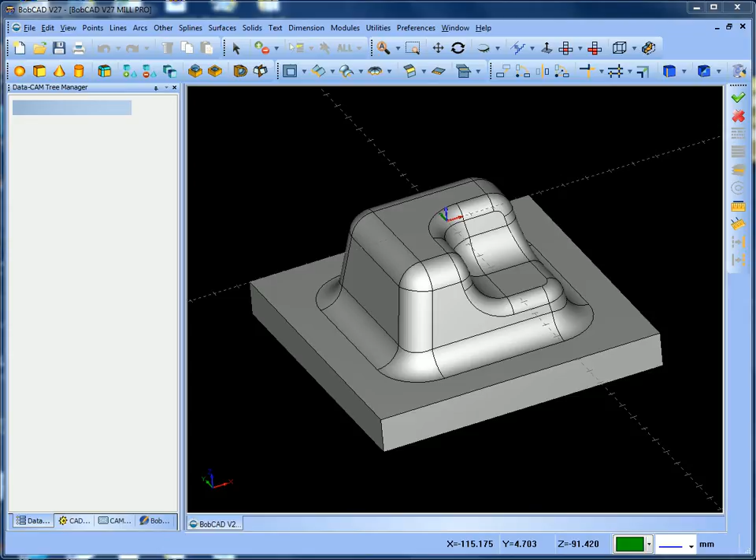So here's where we come into the CAM tree. We can see the CAM tree there, there's CAM defaults. There's the component that we're going to machine. So if I right click and new job, we're going to create a new job. Job's going to be milling. We're using the BC3 axis mill, which is the machine.

And the first thing we're going to do is go to Stock Wizard. So if we select the Stock Wizard, it then gives us the options of creating a rectangular block, a cylindrical block, wireframe, solid model, or an STL file for the stock. But the stock at the moment, I wanted to create a rectangle from this piece of material we've got on the screen, in other words from the model. Select next, and you'll see BobCAD now puts a piece of material of stock around it.

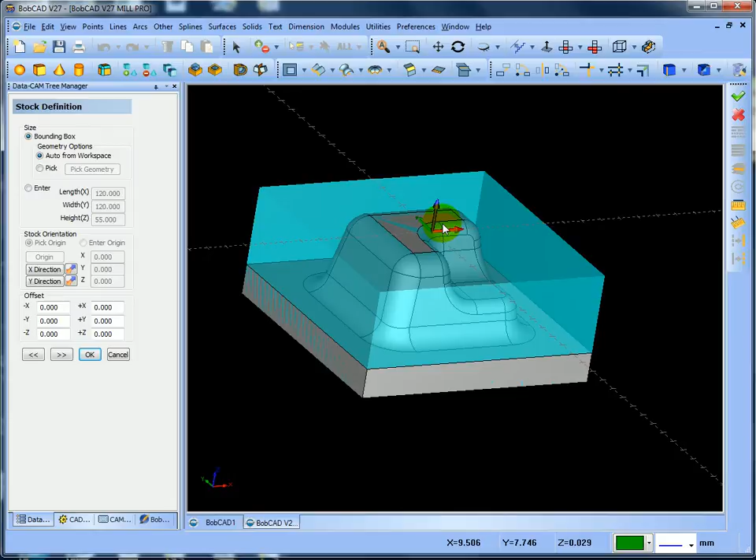You can see its length is 120, width is 120, and it's 55mm high, or below should we say, because it's Z0 and minus 55 to the bottom of the block. Now we can add material onto this if we want to. So imagine I want to face off the top of the job. We need to tell BobCAD that we're going to take half a mil on, so we need to put half a mil on this stock. So on here in the plus value, if I put 0.5 and hit the next block, you will see we've added 0.5. We'll make that 0 at the moment and select the next box.

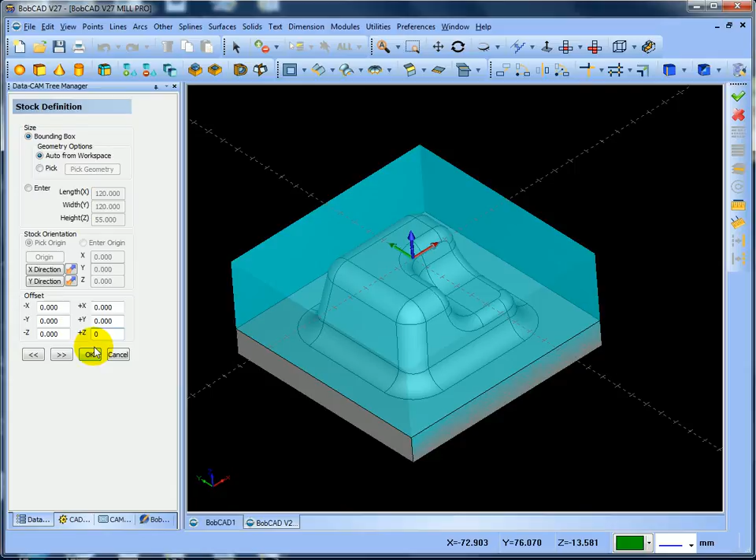So what we do then is we will continue, and here's where you can pick the datum. At the moment I've got it set on the center. If we wanted this bottom left hand corner, I could pick this bottom left hand corner. If I go into origin, come onto here, highlight it, you can see then that's where the datum's going to be. We might want to pick this bottom left hand corner here, so I'm going to pick origin again, select this, and you can see we've got it on the bottom left hand corner as we want to machine the job.

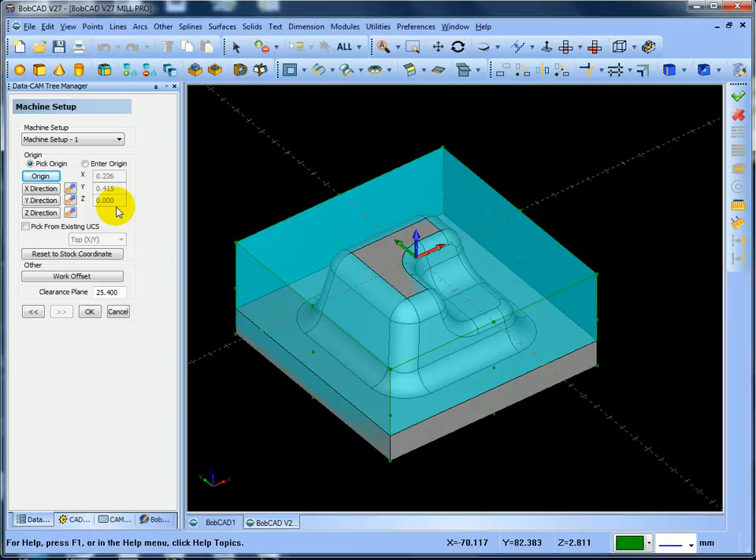But I want it back in the middle where it belongs, so I'm going to go back to origin, put it back in the middle, which is there, and the datum's back in the middle. You can see the 0 at the center point here. So we'll put that back to origin, select OK, and you can see origin is 0,0, or we could have entered that value in there then.

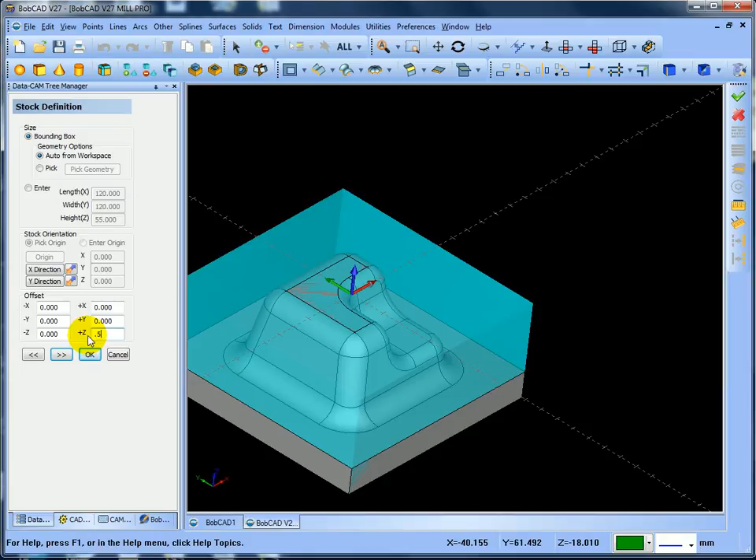So I'm just going to go back and I'm going to add that half mil on the top of the job, and you can see now it's raised it up half a mil. Continue. I want to work on that datum, which is correct, and select OK, and you can see now we've created the stock around the material. What I'm going to do then is we need to face off the top of the job.

So as you can see, this is the machine setup here. This is where the machine setup is. That's where we set the datum. We can blank the stock if you want to blank the stock. Just click on stock, right click and blank. You can see that then blanks it. Or we can right click it, press blank again. You notice the red X at the side. Now it's showing it displayed.

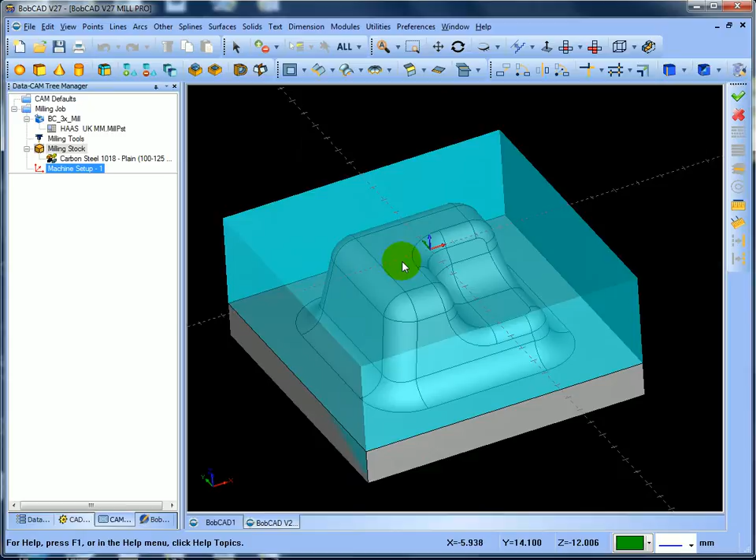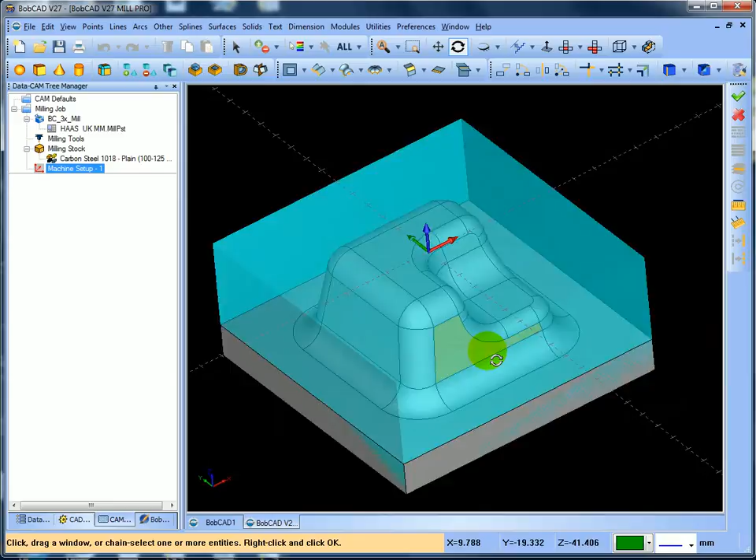Okay. So what we want to do now is we want to create a facing operation to face off the top of the job. So if we go into right click in the machine setup and we go into mill 2 axis, the first thing the software asks us is to pick the geometry. Now I'm going to go into select geometry, and I've got no information off the model regarding extracting information. As well, in BobCAD we don't need to extract. All we need to do is we decide we're going to pick that bottom surface there. Now I can just left click it, come away, and if I right click it and press OK, it's selected it.

If I go next, if I just press cancel and do exactly the same again, right click, mill 2 axis, select geometry, I've highlighted it. Now to save you pressing your mouse button, you can just press the space bar. When you press the space bar, it means OK, it's exactly the same. So if I press the space bar, you can see now next, it's still picked the geometry off the top of that. So what we're going to do is the rapid plane is 10mm above the job.

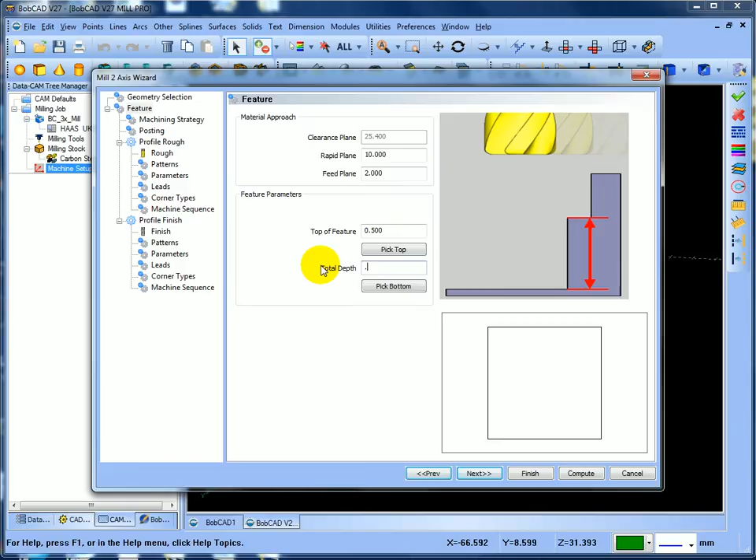Feed plane is 2mm, top of the feature is 0.5mm, which is correct, so we want to take 0.5 off as well. Next, we're going to do some facing operation. Select next, work offset number 1 or G54. We're not doing any rotary output, and we're doing everything in arc moves.

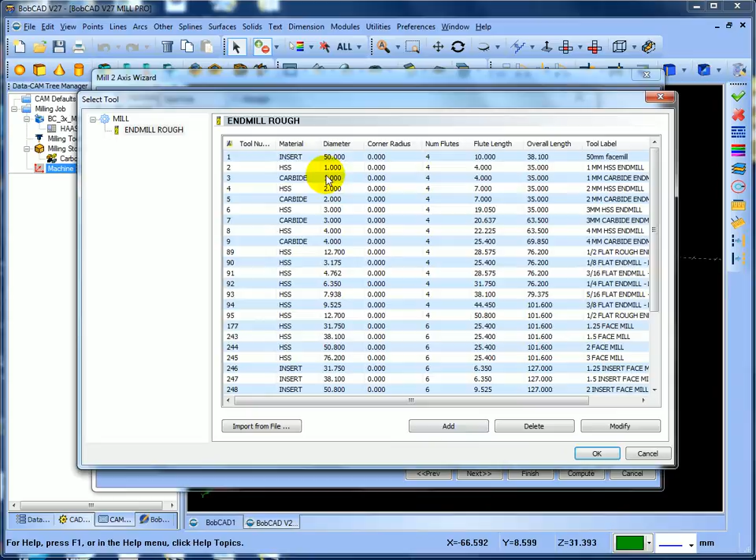Select next. So here's where I want to select the cutter. Now I want to select the cutter, and I have some in my tool crib. So in other words, if I go to my tool crib and go into my add from the tool library, you'll see I've got a 50mm cutter already set up in there. Now at the moment, when you buy the software, it will be all Imperial. Now you can work on the fly and just put things in, or you can build your own tool crib. It's up to you at the end of the day, but sometimes I find it easier just to create the tool on the fly.

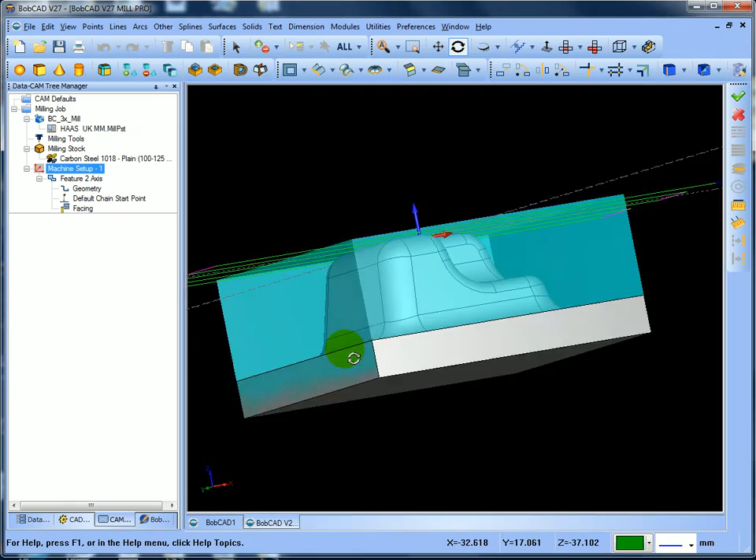Select next. We're going to go zigzag back and forth. We're going to come off the workpiece by at least the radius of the tool. I'm going to do it in the X direction. I want width of cut 50%. Select next. Bottom allowance nothing, so we're going to take 1 cut. Next. Length 6.35. Next. And we're doing direct, or you could come round with an arc or direct. Select compute, and you can see I've created a toolpath on the top of that.

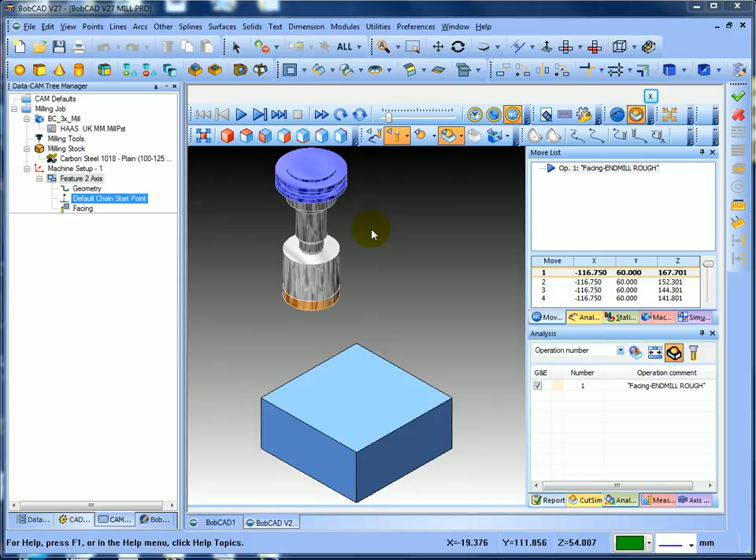Now in the simulation, you can see that feature there. If I go into modules, simulation, what it'll do then is come to the simulation, and the simulation shows the block that we generated for stock. I'll take the toolpath off, and all I'm going to tell it to do is come across and machine that top surface, which it has done. I can put the model on, the model's underneath, and I can do a comparison between the model and what we've just chopped off there.

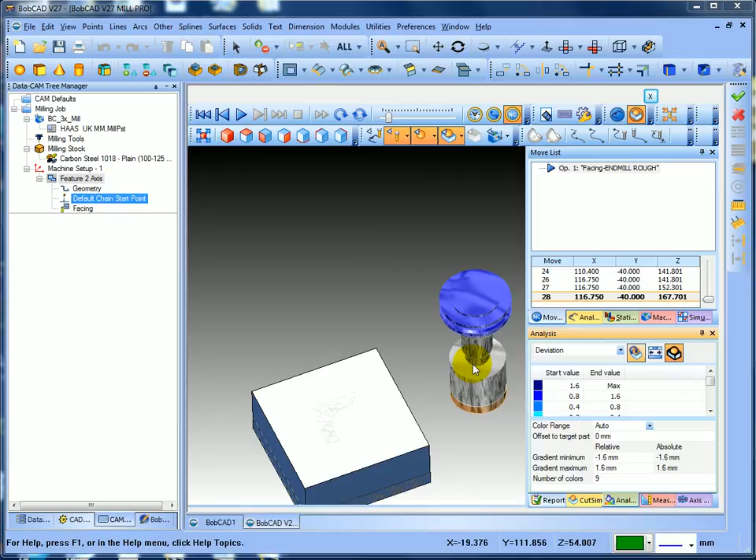So if I go into here, select deviation, select OK, and what it'll do is just refresh the screen, and we'll see the deviation come into it. So there you can see it. If I actually turn the model off, you can see we've got a green, just view all, and you can see we've machined the top of that, and it's showing us a green mark that we are at that position. So if I close the simulation down, you can see we've gone across it that way.

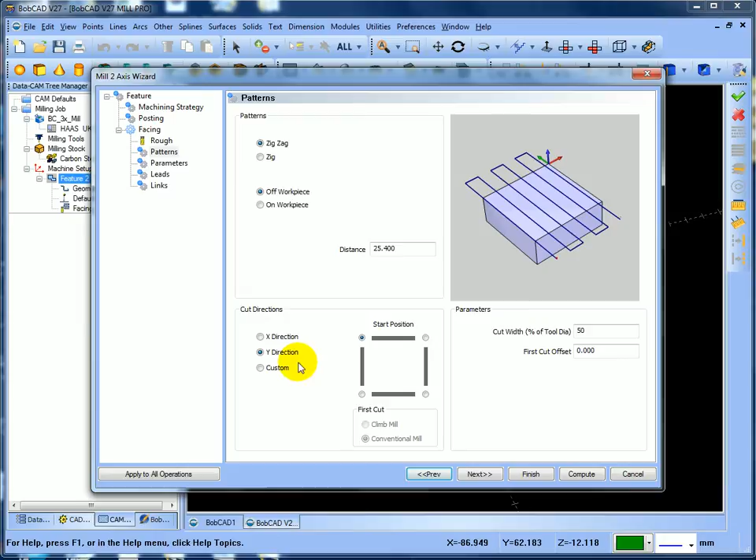If I right click and edit, I can go into the patterns. In the patterns I can go into the Y direction and say I want to cut it in the Y direction. If I select compute, you can see it's going the other way now. So if we go into modules, simulation, and we turn off the toolpath, we can see it's going to go the other way now, which is what it's doing.

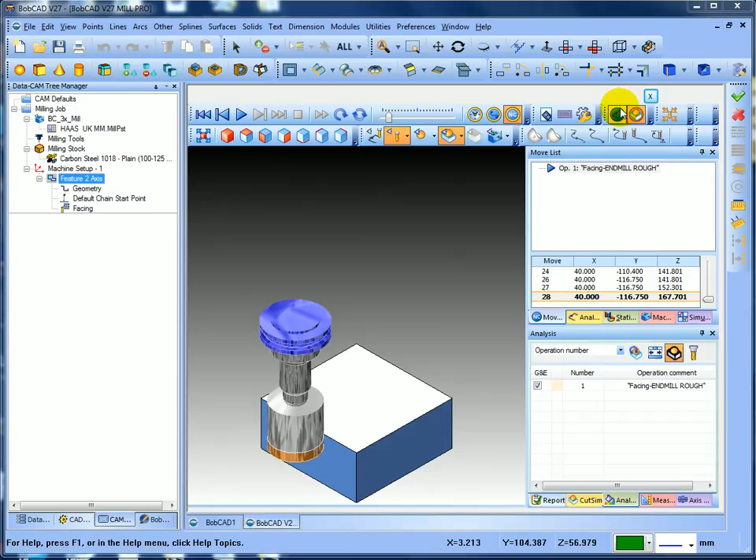Okay, close that down. I could, if I wanted to, right click, edit the operation, parameters, go back into patterns, custom, and 45 degrees, and compute. And you can see now, if I right click, we'll go into modules, simulation, take the toolpath off, and you can see now it's going to cut that at 45 degrees across the top of the job. So you can cut that face any angle you want. You can cut it in the X or the Y, or you can cut it at your own angle, whichever you want to do.

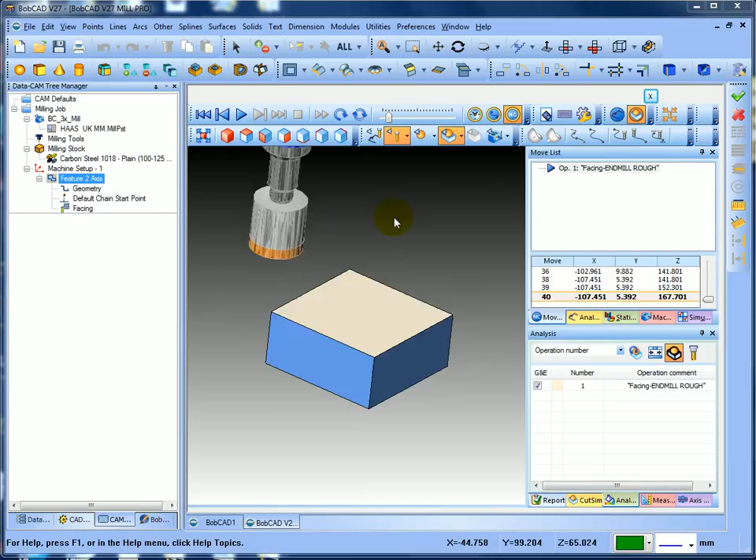Okay, I'll pull that back, edit, and go to features, patterns, go into the X direction, compute, and you can see now it's back to going in the X direction. If I right click and edit, let's go to leads, links, I'll do it with an arc, and tell it to compute. You can see now radially it will come in, then come round, come in, come round.

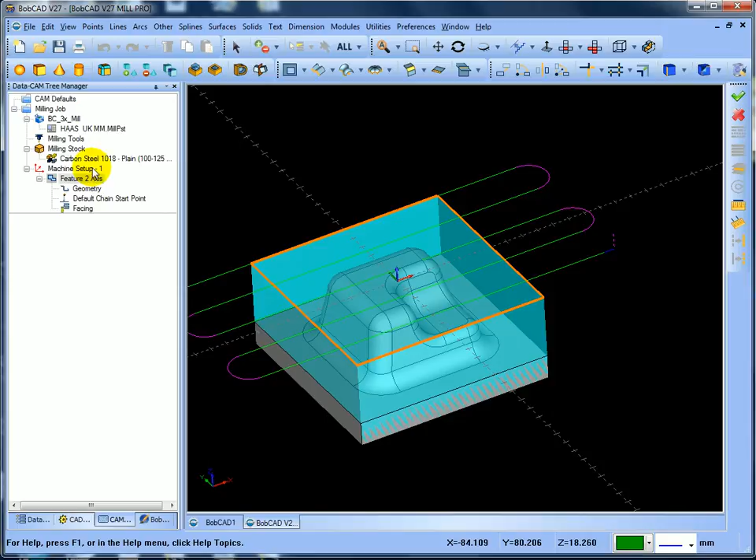So modules, simulation, and what I'll do then is just turn the toolpath off, and it'll come on, and you can see it's arcing round. So you could stay on the face, not make that length, and then just come round so you're just cutting straight onto the surface.

So what we've done is covered the facing operations. You can see where you can change different directions or cut it at different angles. What we need to do next is to rough out the 3D shape.

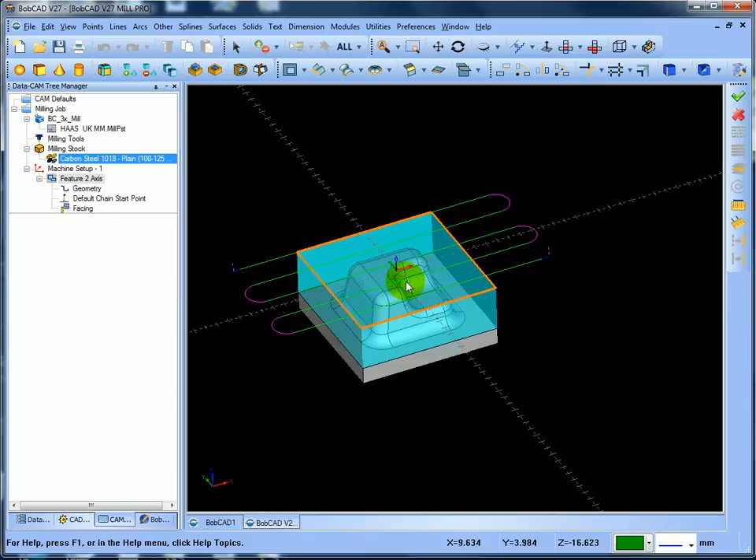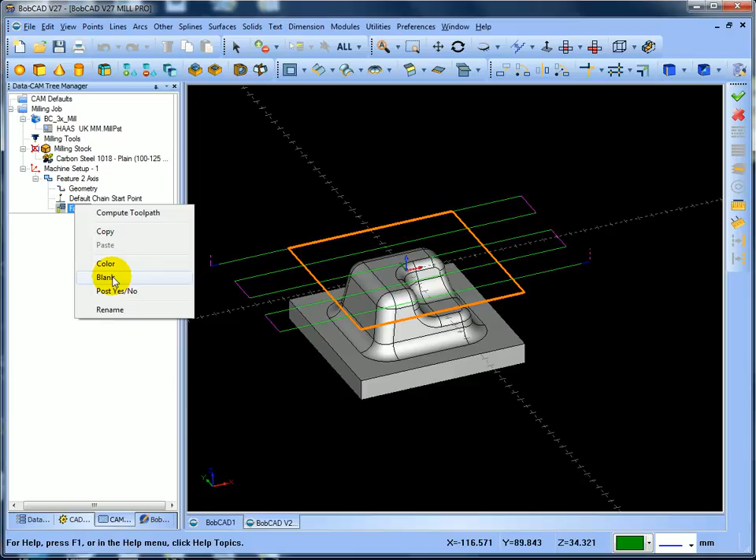So what I'm going to do now is just blank that toolpath, which blanks the toolpath off there, and what I'll probably do is blank the stock as well. And it doesn't matter in the setup, in the machining feature, excuse me, you can just click on it. If we actually go into it, blank and unblank toolpath, you can see where you can just blank that toolpath. But if you click on the feature, it'll show you what features are doing what.

So what we need to do now is we can go in there, right click, we can rename that, I could call that facing face, and so we know what that operation is to do that operation.

So what I need to do now is introduce another one where I'm going to do some high-speed machining. I want to machine this component out. I want to cut it at 20mm depths of cut, and I want to rough it and semi-rough it at the same time. So in BobCAD, right click, I'm going to go into mill 3 axis, select geometry,

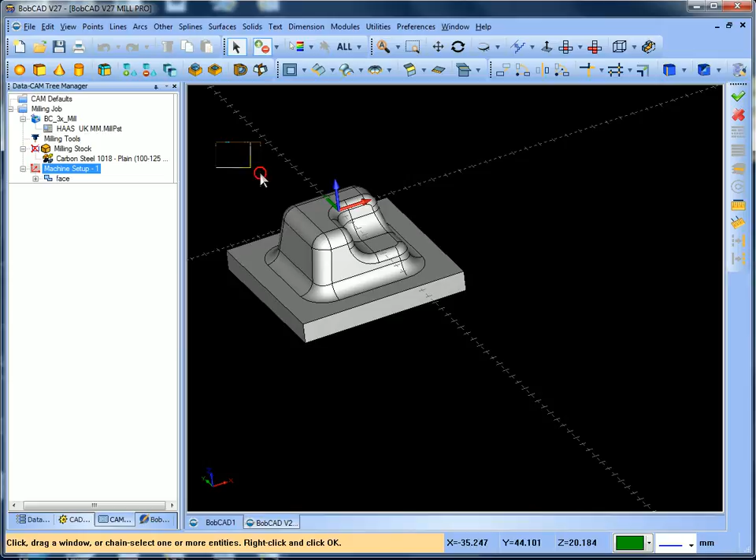well, we need to select the geometry, which is the component itself. So if I select it all and just press the space bar, it's done it. Now it wants me to select a boundary. Well, I don't need to select a boundary for what I want to do. So if I go next, I'm going to set my rapid 10, 2. I can pick the top of the job, which is here, come onto the model, and you can see it's picked it as Z0.

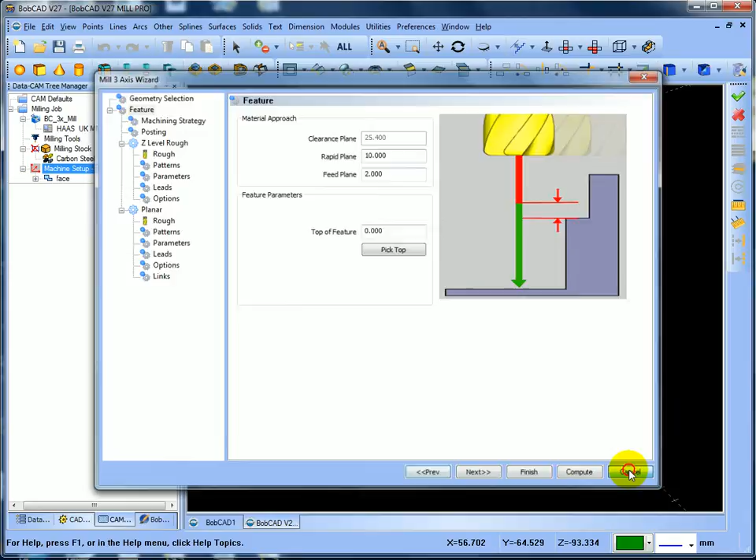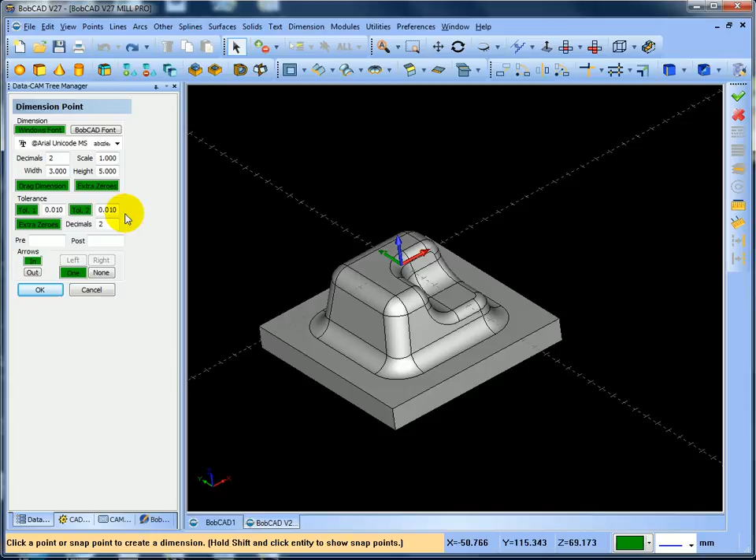One of the other things as well, if I just cancel that operation that I'm doing at the moment, is I need to get down to this level, and I don't know what that level is. Now remember when we went into dimension video earlier, we can just click on a point and find out that that is actually minus 40mm down to that depth there. So that's the depth we're going down to. Just undo that for a minute, cancel that. I've got the information I need for the machine depth.

So back in again, let's go into 3 axis, select the geometry, select it, right click, press OK, or press your space bar. Next, my rapid's 10, I'll do 2, I can pick the top of the job, which is off that line there, which comes 0. Next, I'm in the Pro version now, so I want to do advanced roughing. So select next, number 1, next.

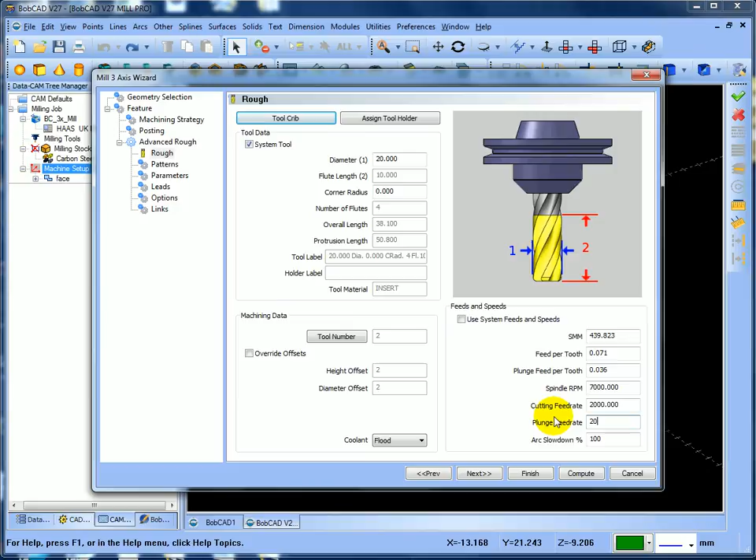I'm going to use a 20mm cutter. So if I put 20 in, I can change the speeds and feeds, which I will do. I'm going to overwrite them. So I'm going to say I've got a 7000 and I want to run it at 2 meters and plunge in at 2 meters. Plunging in is because I'm going to actually come off the job.

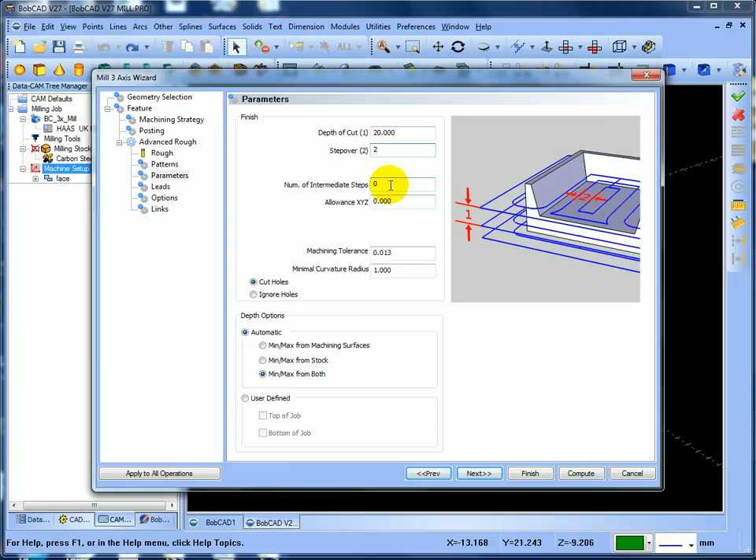So we go next. I'm going to do advanced roughing. I'm going to do zig, climb mill. Next. If I actually go back, previous, conventional mill, yeah, climb mill. Next. I'm going to do a 20mm depth of cut, and I'm going to come in 2mm at the sides, and I'm actually going to come up 10 times. So it's going to come down, rough it out 20mm, and then step back in 2mm intervals to come back up the 3D form.

The top of the job is 0, the bottom of the job is minus 40, which is what I found out when we got that dimension off there. And I want to leave in X and Y and Z 0.5mm. Next, center cutting tool, just machine flat areas. Next, direct and compute. So it'll just take a little while to compute it.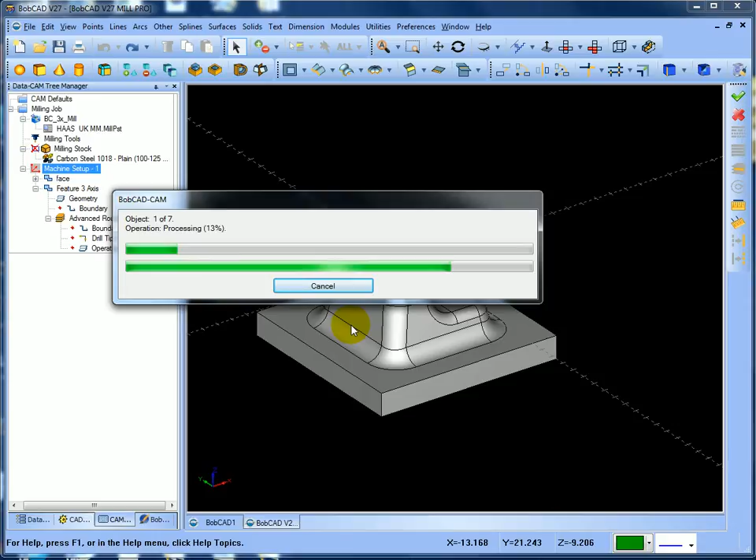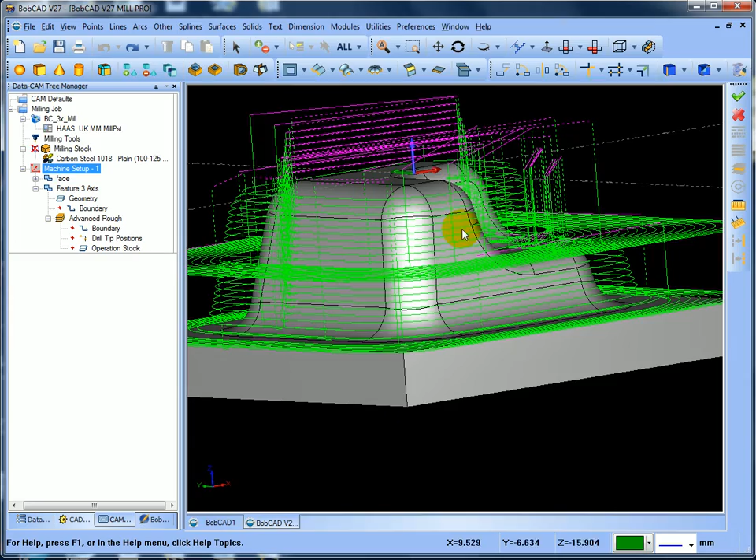And you can see there the toolpath's been created. So what it's going to do is come down in 20mm depths of cut, at high speed its way inwards, and then it'll come down another 20mm, and then it'll step up in 2mm cuts and rough out that 3D shape for us.

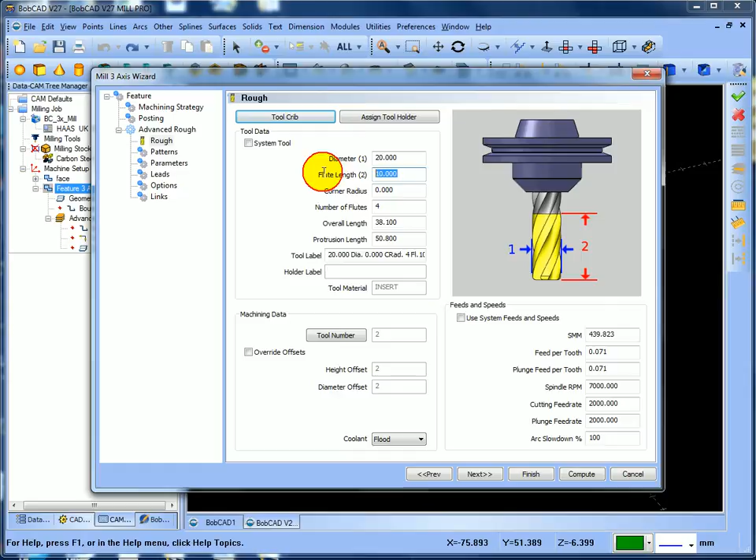So if we have a look at the simulation on this now, if I go into modules, simulation, okay, I'm just going to take the toolpaths off there. I've already done the face and we've already seen that. So if I select the next operation, you can see it's set the tool up there, and you can see I haven't got enough length in the tool, so I'm just going to go back to that operation, edit it, next, and I'm just going to give it the flute length 25 and just tell it to compute again.

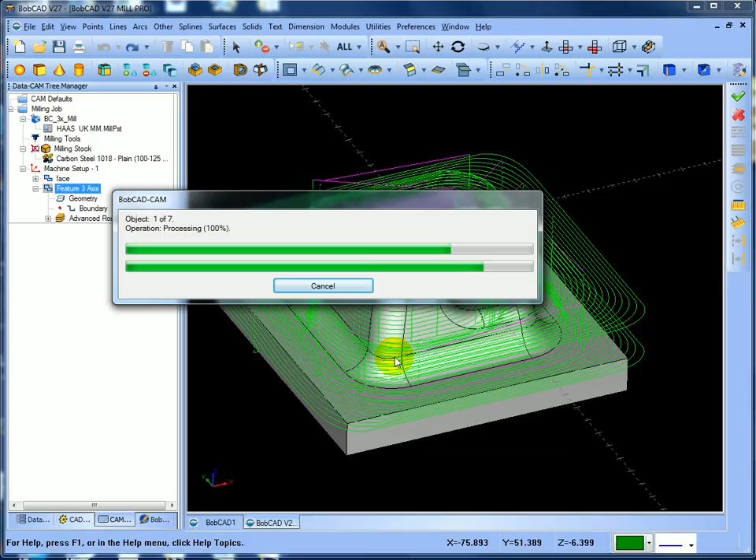Okay, let's go back to the simulation. Get past the face mill, and you can see I've got the flute length back there for the simulation. So what we'll do is we'll run that now. Press play. You'll see it'll just come on the side, and it's gradually going to step in and rough out the outside.

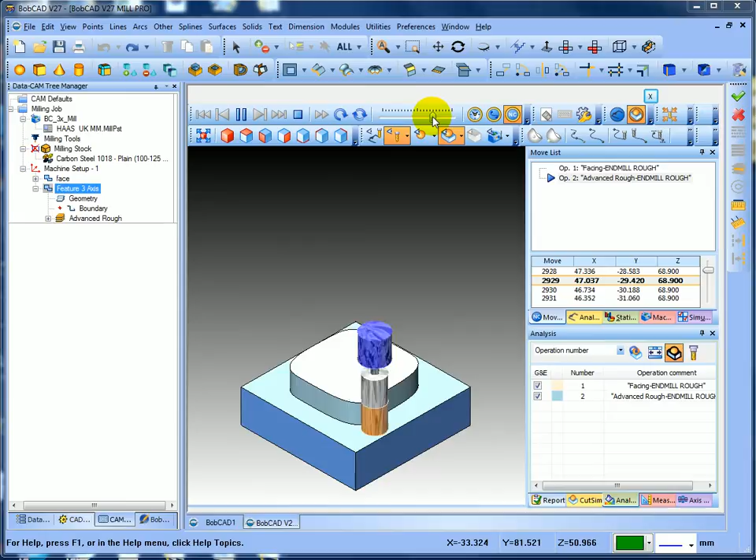So we'll speed it up a bit, and you can see it's gradually coming in by the percentage I stepped it over with. So it'll come into its first depth of cut, down for second depth of cut, and then it'll start seeing the 3D shape. So it's going to rough and semi-rough. It's coming back up now, and you can see it's semi-roughing out.

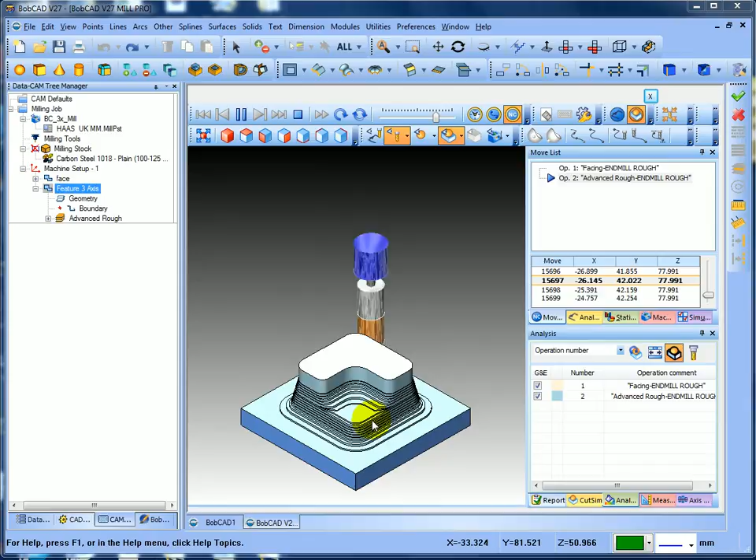There you go, you can see it rough and semi-rough with the same operation. We could change the step over on there as well, so we can get it a little bit neater than that. So if I close that up, go back into my operation, edit, sorry, cancel that, feature, edit, next, next, next, next, next. So now I want to do it in 20, so it'll come up in 1mm cuts, compute.

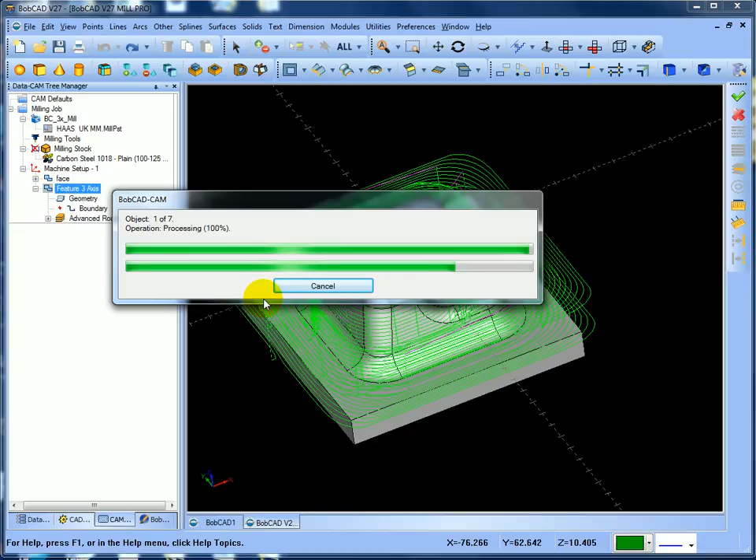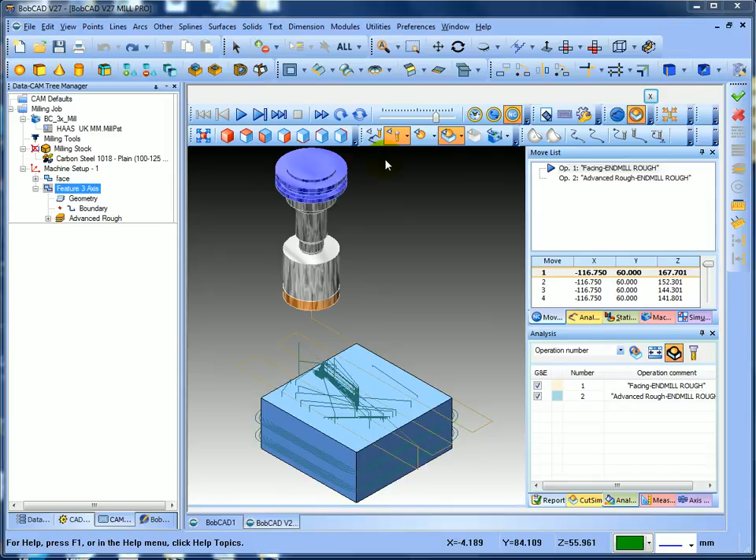As you can notice, BobCAD displays on the screen what's happening, so you know it hasn't stopped or frozen. You can see it's doing what it's doing. And if we look at it now, you can see the step overs are different there. So if I go into modules, simulation, that's okay. I'm going to take that off. I'm actually going to advance, and then I'd run it again.

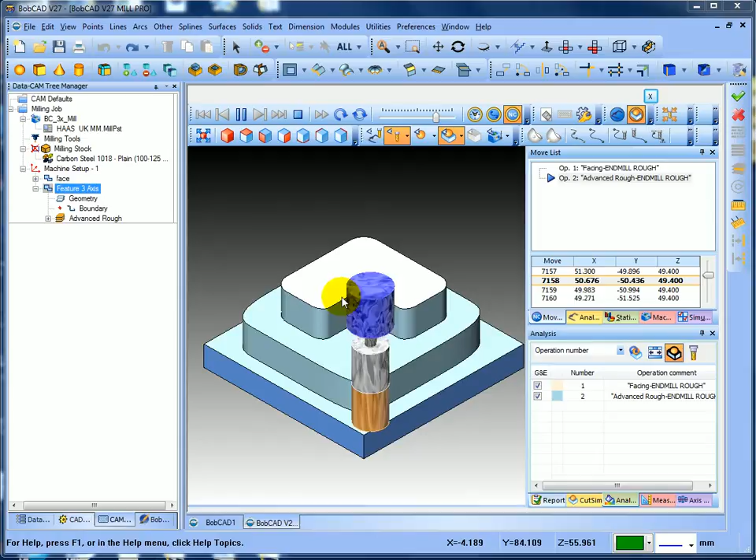Still come down at 20 mil. In for the next pass. And you'll start seeing a finer step over as it's coming up now, because it's coming up in 1 mil steps a cut. So in BobCAD you can rough and semi-rough with the same tool, and you can see you've got a better toolpath and less work for the finishing tool.

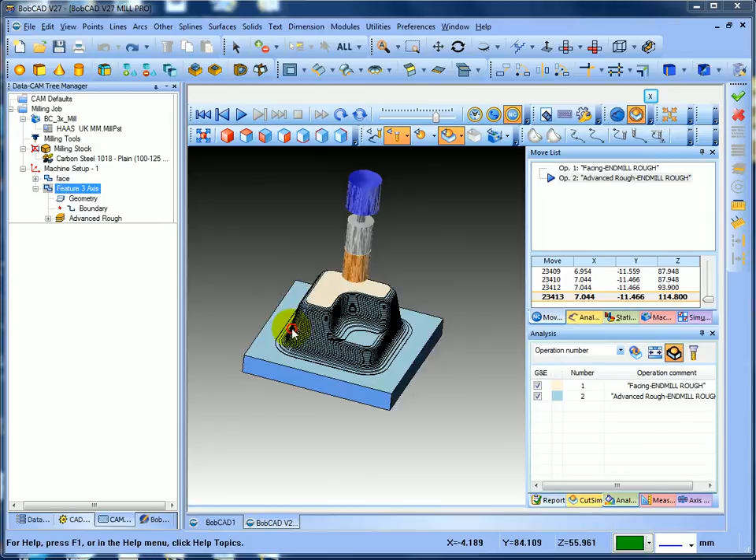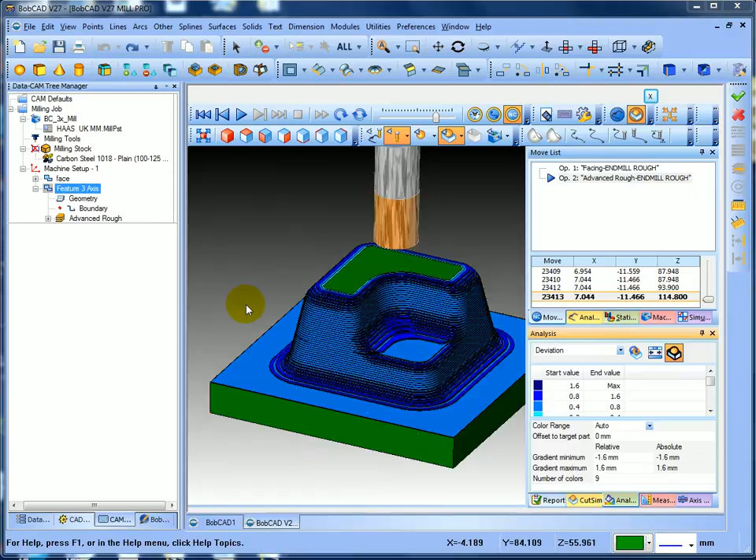So that's the high speed roughing out. As I say, we can look at it, and we can also do the deviation. So we'll look at deviation. So now it's showing you where we've finished on the top. If I look on the top and just press that mouse button, you can see I've got no material on there, but if I press on this one, you can see I've got 0.5 of a mil on there, which is what I told it to leave on.

Same for that one there. Press that, you can see there's a deviation. So let's just rewind that up. You can see the target tells you where you're leaving bits on, whatever you're doing. So if I close that up now, what we want to do now is some finishing, where we're doing a Z level finish down it, and some flatlands machining, which is what we'll do next.

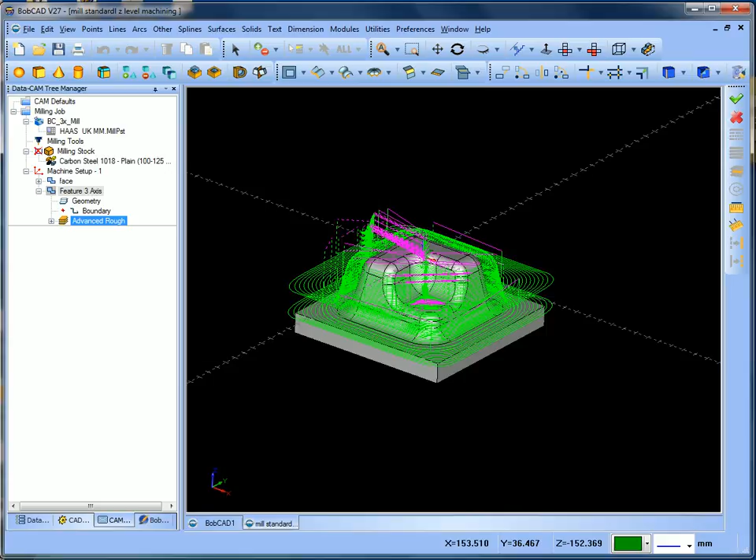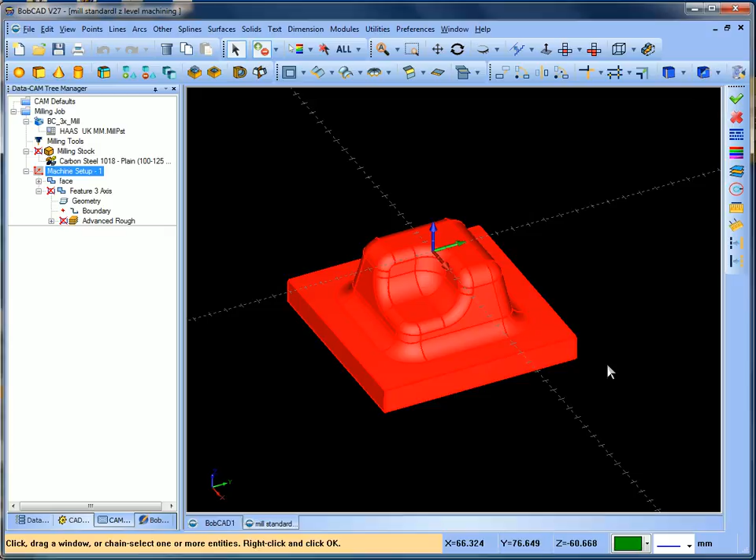So what we're going to do now is some flatland machining. We just want to machine the flats. So if I just blank that toolpath, we'll create another operation to do any flats on there. So right click, 3 axis, select the geometry, press the space bar, next, 10, 2, top of the job, 0, next. We want to do some flatlands, next, G54, offset, next.

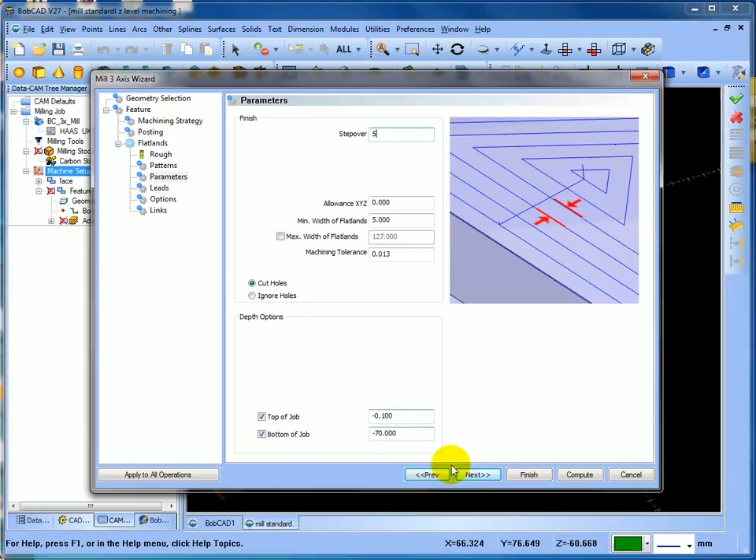Let's have a look. Let's put a different tool in. Let's put an 8 mil, overall length, next. Zigzag climb mill, next. Top of the job, bottom of the job, -70. I don't really want to do the top, so I'm going to put -0.1. With the flatlands, let's just say it's 5, allowance nothing, step over 5, next, next, next, and compute.

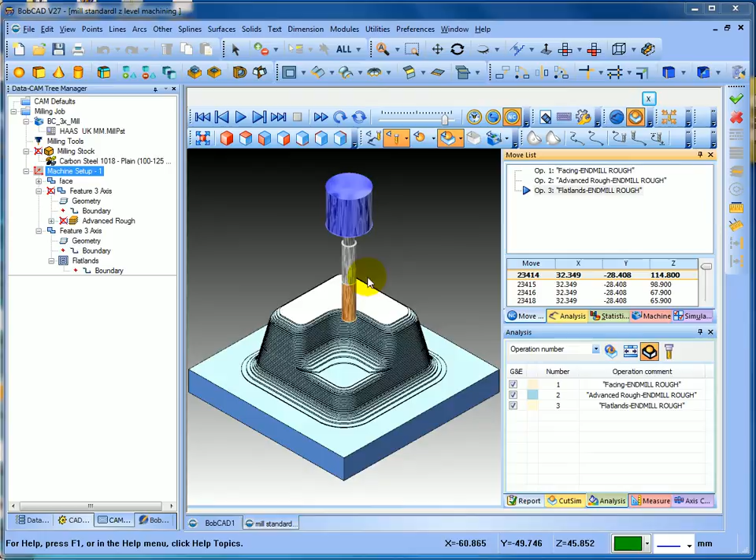So you can see now it's come in and finished the flatlands. It hasn't done the top because we'd already done that when we did the face mill. So let's have a look at what we've got now. So if we go into modules, simulation, just turn the toolpath off, and what we'll do is go to flatland. So what it's going to do now is just run through the verification rather than you run it. You can see it'll go down to that operation, and you can see we're at that operation there. So what we'll do is we'll run the flatlands.

You can see now it's coming in, machining that out, coming around the sides, machining the bottom of that. And you can see the percentage of step over I've done it at. So now it'll just come in, go round. Speed that process up. You can see now it's come round and machined it. So if we look at our deviation,

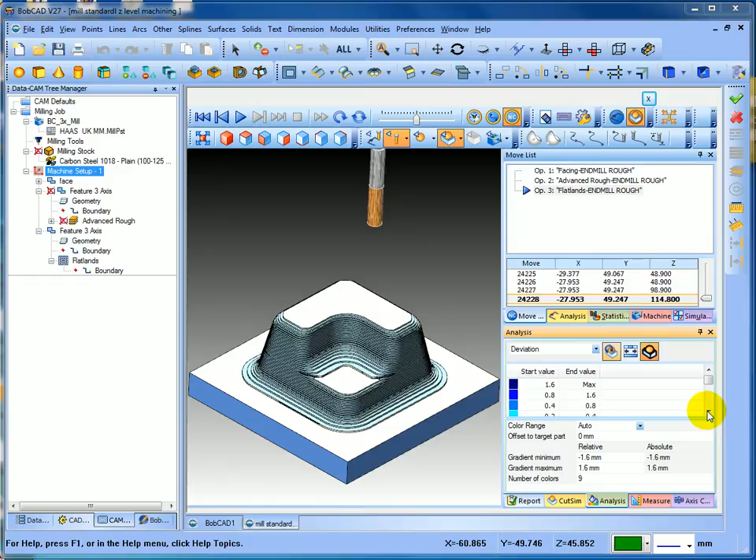I'm looking for green areas. Go down to the tolerance, you'll notice that's between minus 0.2 and plus 0.2. So you can see it's finished machining there, finished machining that, and finished machining the flatland areas there. So what I want to do now, I'm just going to blank this out. And what we'll do next is we'll do the Z level down the component.

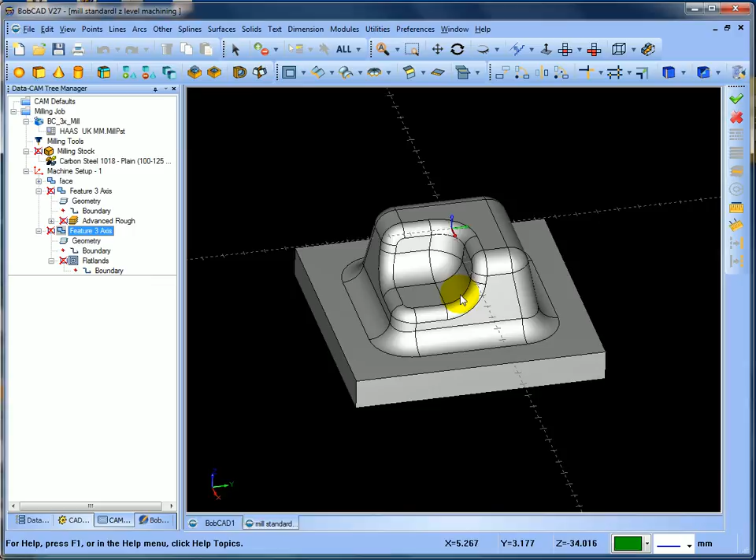So what we'll do now is we'll do the Z level when I want to go down this component. You wouldn't do a planar across there because it wouldn't give you... some people ask me what's the difference between Z level and planar. Well, Z level, if you imagine a cup, is for going round a cup, and the planar is for going over shallow surfaces. So when you decide which one you want to do, it's Z level for going round on this particular type.

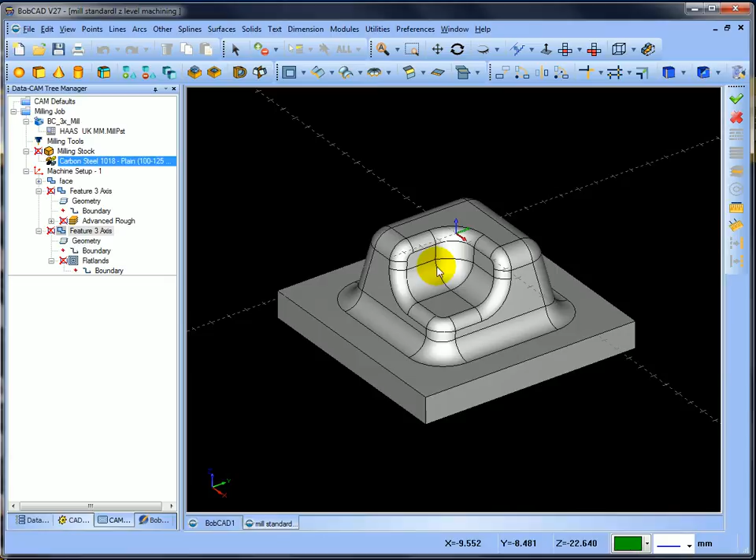On the planar one, that would be a planar toolpath on the last video. You wouldn't do a Z level on there because you wouldn't get the finish. So this is what we're going to do here. We're going to do the Z level. So let's go into milling stock, into machine setup. Let's introduce another 3-axis toolpath. Let's select the geometry, press the space bar, next.

Okay, I'm just going to set that at 10, 2, and top of the job is 0. Sorry, 0. Let's put that in as 0. Next. What I'm going to do now is I'm going to do a Z level finish. So let's see how the Z level finish goes. This is in the standard, by the way. So I'll go next. I'm going to use work offset G54.

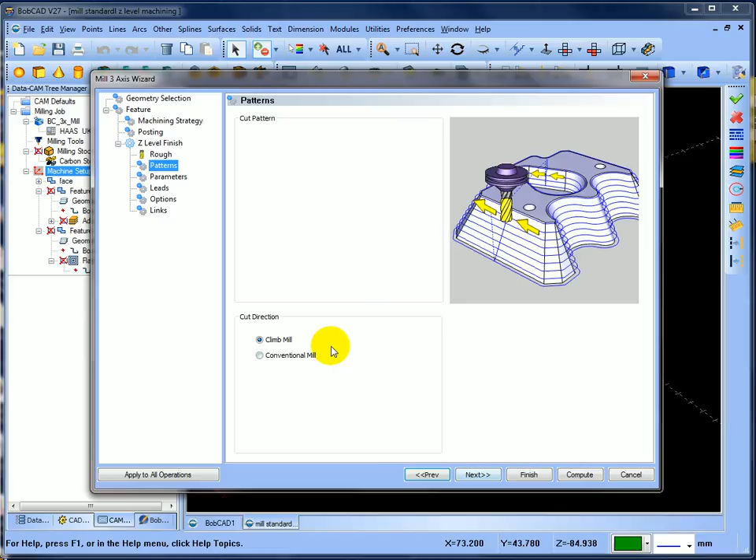So if I use it as 0.2, we're not leaving anything in there. We can dictate by the top and the bottom of the job. So if I just say 0 to minus 40 is where I want you to work. You can increase this or decrease it. The less you go, the finer the toolpath will be. There are no holes to cut, but I'd ignore holes if there were any.

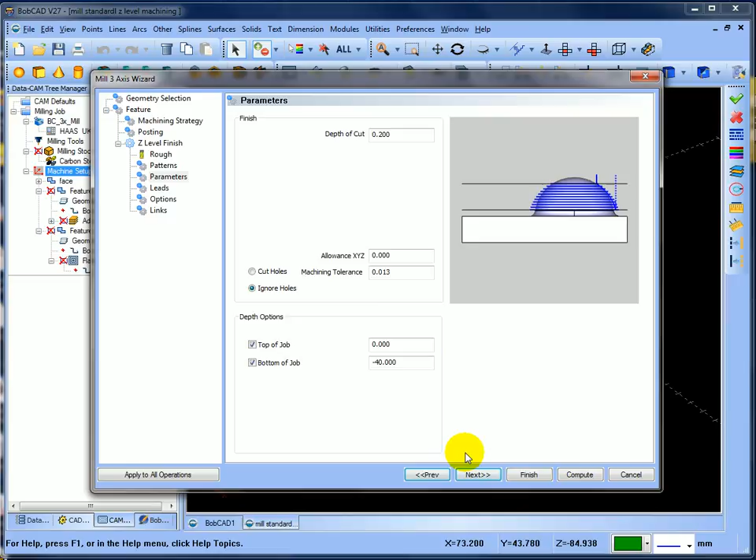So select next. We're going to plunge. Next. We can either cut all or the innermost. Well, we'll just cut all because that's all we want to cut on the job. Next. We want it to follow. You can get it to lift off and come down, but you'll end up with a mark. You can get a spiral effect if you want to come round it, or you can get it to retract and come up. We're going to use follow, linking follow, and compute.

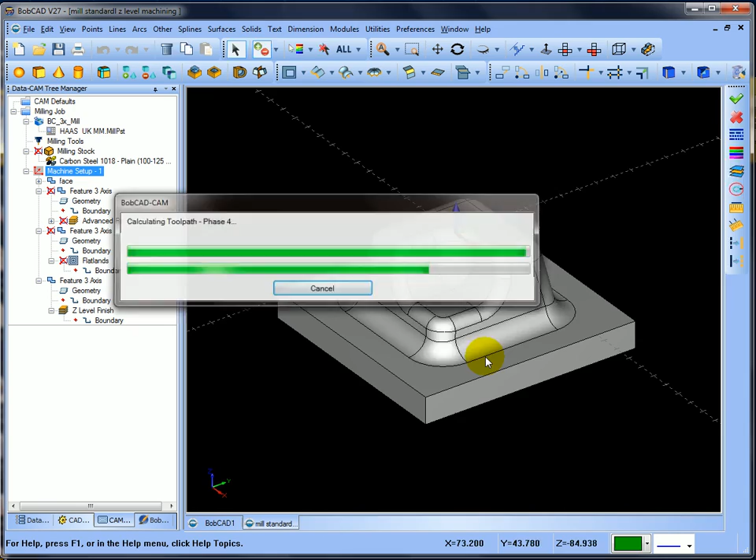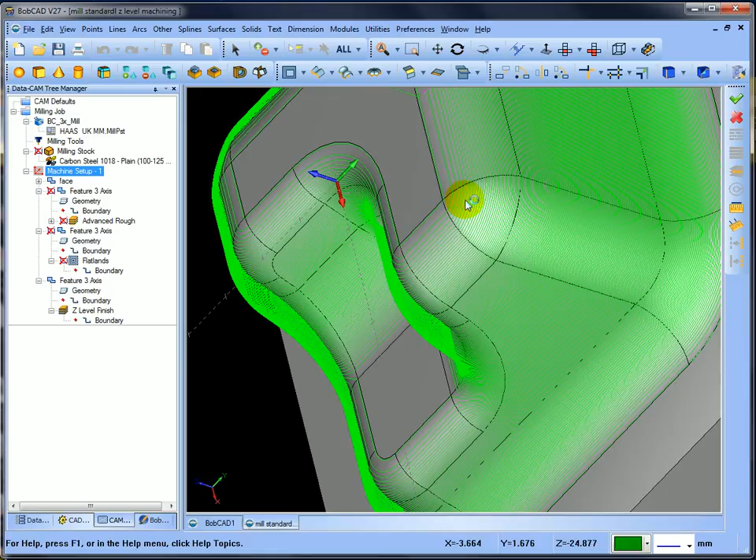Just take a minute to generate the program, and we'll see the difference between a planar and a Z level. So if you have a look at what we've got there now, we've got a Z level toolpath which is going round it. You can see here, you're always going to get this sort of effect, because you're asking it to come out 0.2, 0.2, and as it gets further down, it comes out more. You see how more coarse that is, coming down there. So it will give you a different type of finish. I'll show you what I mean when we do the simulation.

So if we go into modular simulation, I'll just take the toolpath off. As I said before, we'll just get the verification to go through those operations we did, so we're not waiting to simulate them. And you can see now we're on the Z level. There we go. So what I'll do is I'll run that now. It's stepping out, that's the distance it's going to step out. Let's speed the process up.

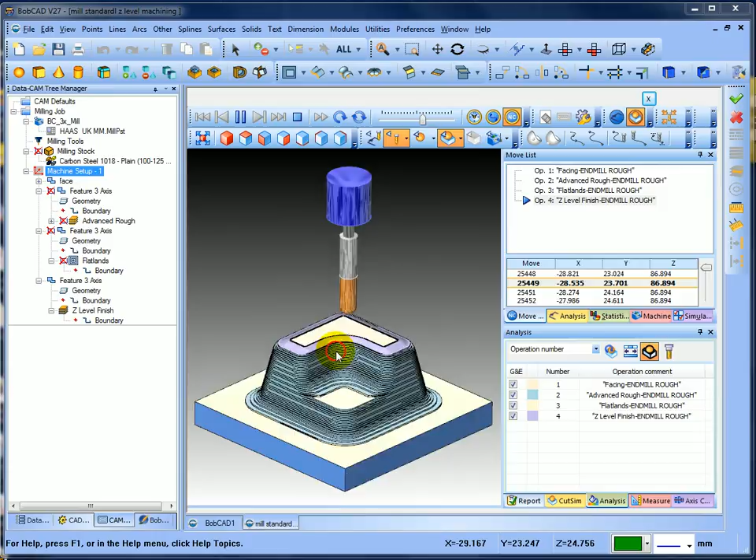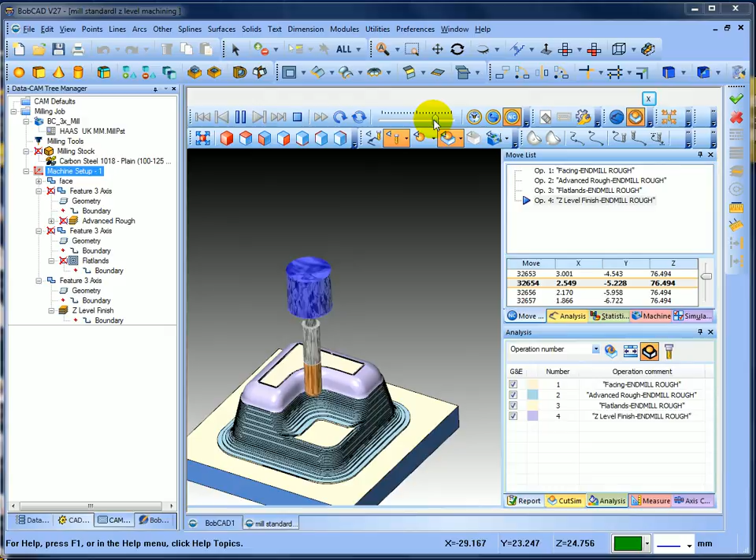So what's happening now is it's doing the Z level around the component, as against going across it, which is planar, and you would do that for a shallow. In Z level you get a constant toolpath around it. Speed the process up. There's probably some areas in here we're not going to clean up, and probably some area down at the bottom. But we can come in and put a planar toolpath and just clean up that. And see what it looks like. And we'll speed that up to the end.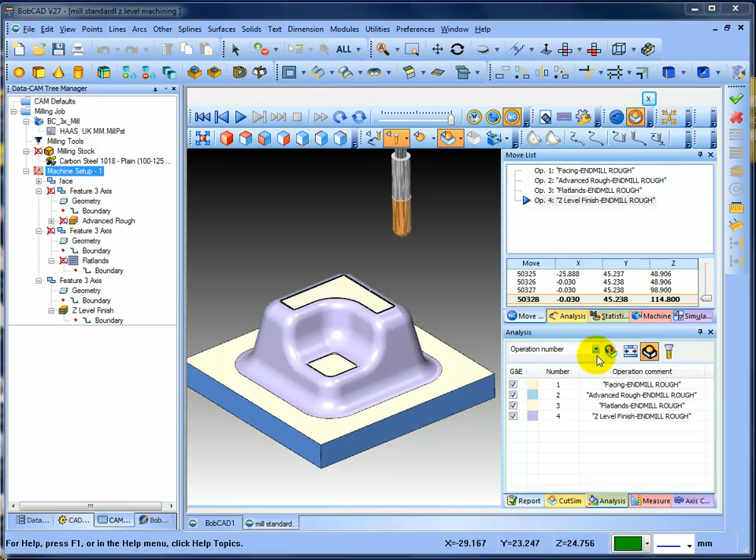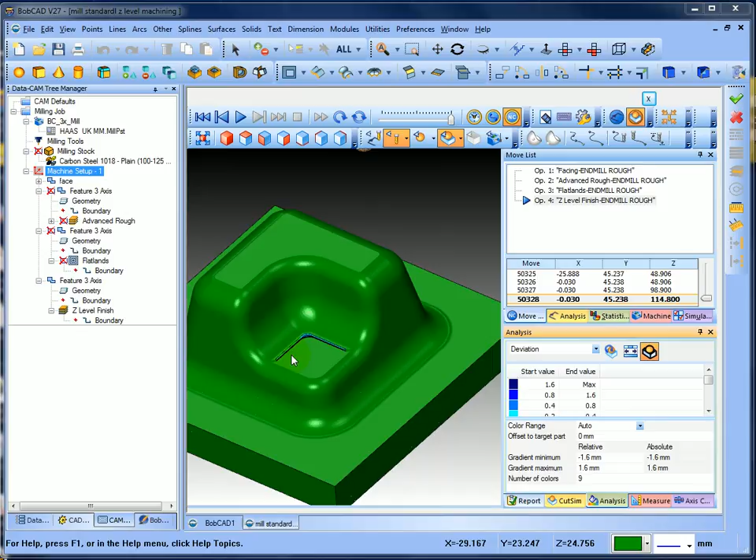Okay, you can see we've done a Z level down there. What we'll do is we'll just do a deviation between the model and what we cut. And there you can see it's done a Z level down there. Looks like that's okay down there, but there's an area here we may need to just machine out from the flat. So we can put that operation in, and we'll set that up now. Okay, what I'll do is just blank the toolpath.

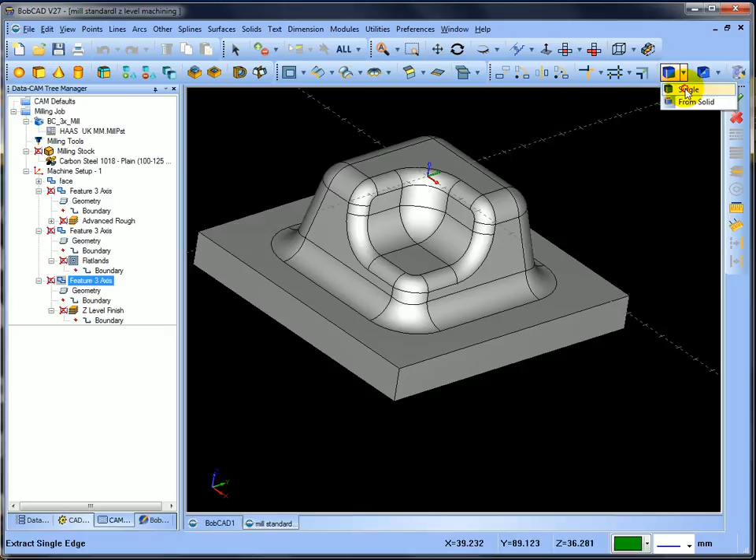So we've got a little area here that we need to machine out, which is here. So we're just going to make ourselves a little boundary so we can contain the area that we just want to pencil mill. And I'm going to step into here a little bit as well. So what I'm going to do is I'm going to extract this information off this surface here. So if I go into extract, single, I'm actually going to get it to project up to Z, this surface here, and select OK. And you can see it's put that boundary there.

But because I want to go into here a little bit, just to clean up and across there, what I'm going to do is I'm going to offset that profile, that boundary a little bit. So if I go into lines and go into parallel, I'm just going to move them, let's say 3 mil, and select I want to go that way, and select this one and I want to go that way. And then what I'm going to do then is go and trim.

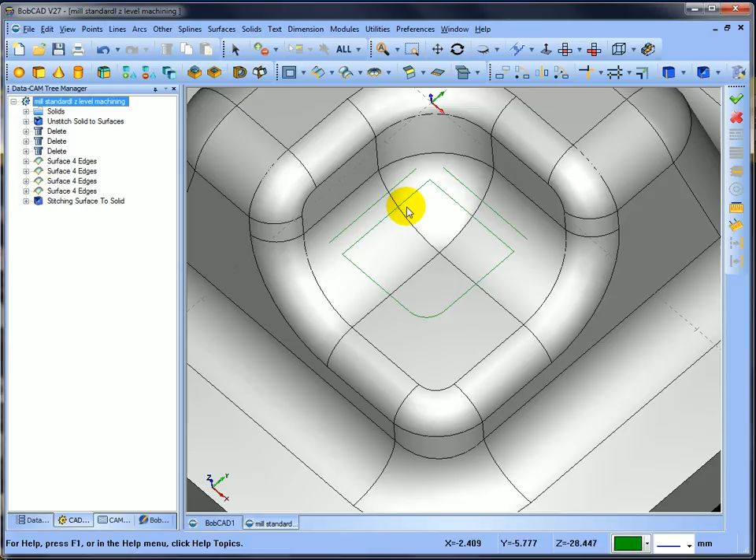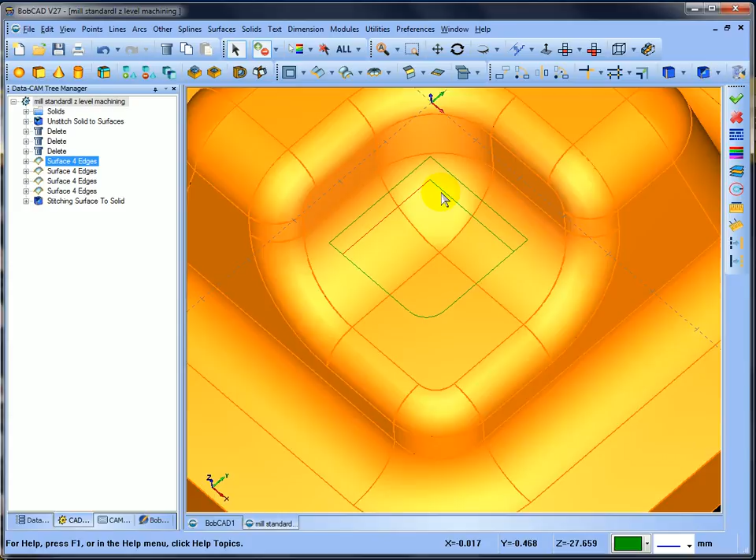So if we go into the trimming, trim 2, I'm going to trim this entity and that entity, and I'm going to take that entity, that one, and I'm going to trim that one to this one and cancel. So what I can do now is just select that one, this one, and we can put that in the bin. So cancel. So what we can do now is we've made ourselves a little boundary that I want the tool to just go around, just to clean that out.

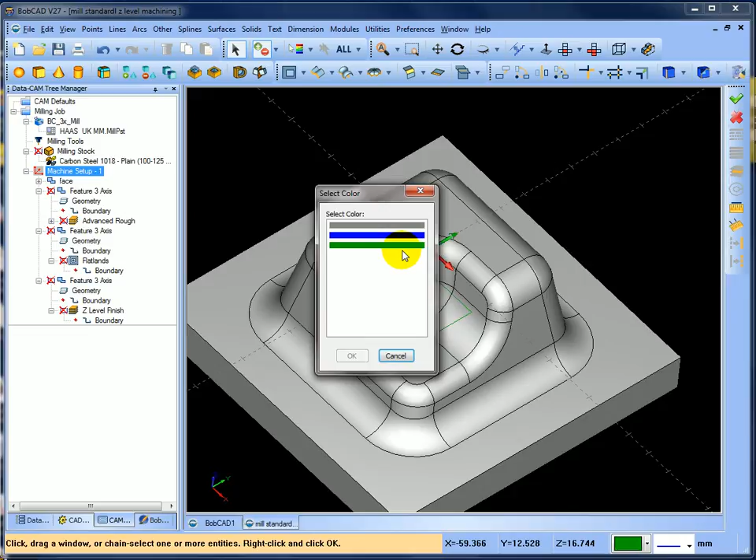And what I'll do now is I'll go into here. I'm going to create myself a new feature, a 3-axis feature. I'm going to select the geometry, which is, now it's going to ask me to pick everything, but I don't want to pick the boundary as well. So what I'll do is I'll select by colours, because that's easier, and I'll pick everything that's that colour. You can see I've picked that. Right click and select OK, and then I want to select a boundary. Now, to save me picking anything, I can pick by colours, anything that's green, and select OK, and you can see it pick that boundary and select OK.

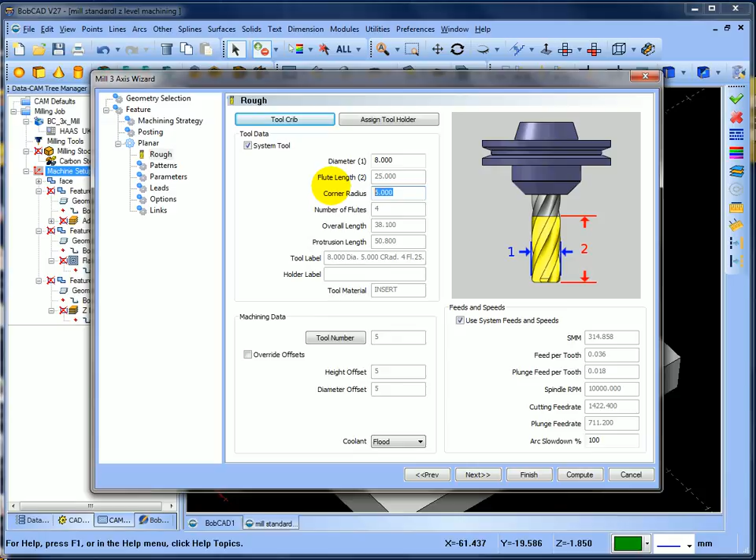So go next. I'm going to set it at 10, 2, top of the job is 0. Next. I'm going to do a little planar operation. Next. Next. I'm going to stick an 8mm with a 5mm rad. Make sure there's enough protrusion. There is. Next. I'm going to go zigzag, whatever angle, 90 degrees. Select next. I'm going to do a 0.2 step over. Top of the job 0, bottom of the job -40. Next, plunge, yeah, and we'll do follow and compute. And you can see there we've created a toolpath around that shape.

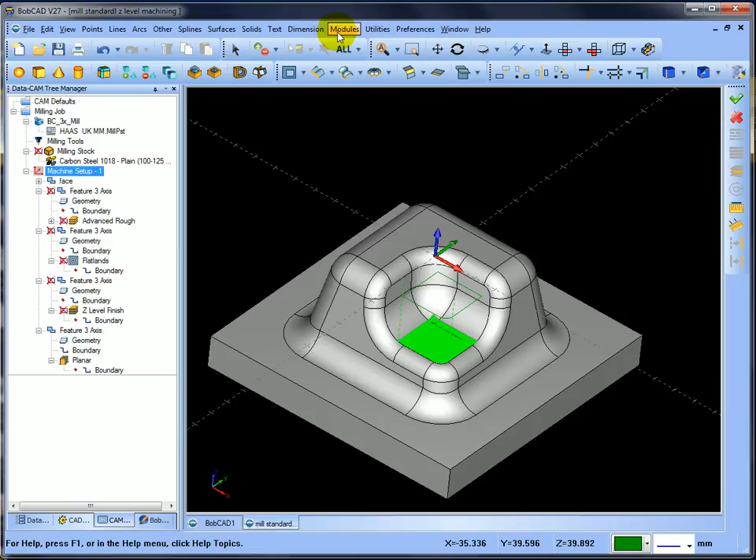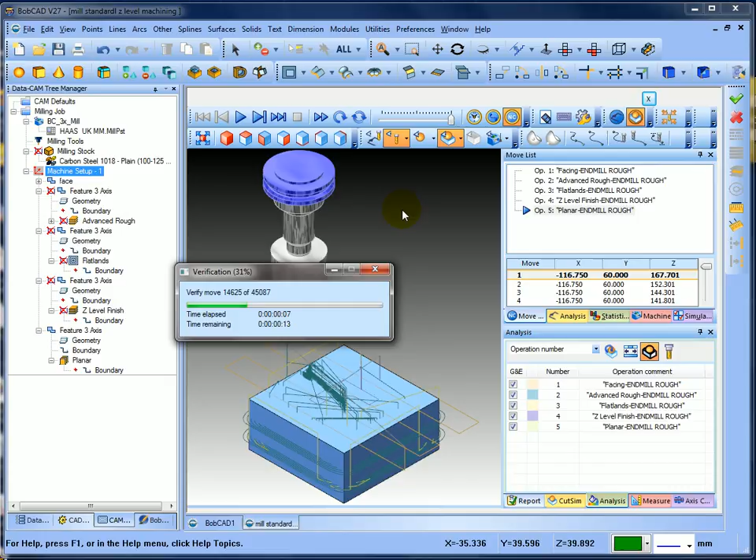So what we can do is we can just run that, and it should clean up that area. So if we go into modules, simulation, okay, I'm not going to go through all them toolpaths there, just get the verification to run through it. Okay, let's turn the toolpath off. So all it's doing is just coming against that face and going to remove that. So we get it to blend up.

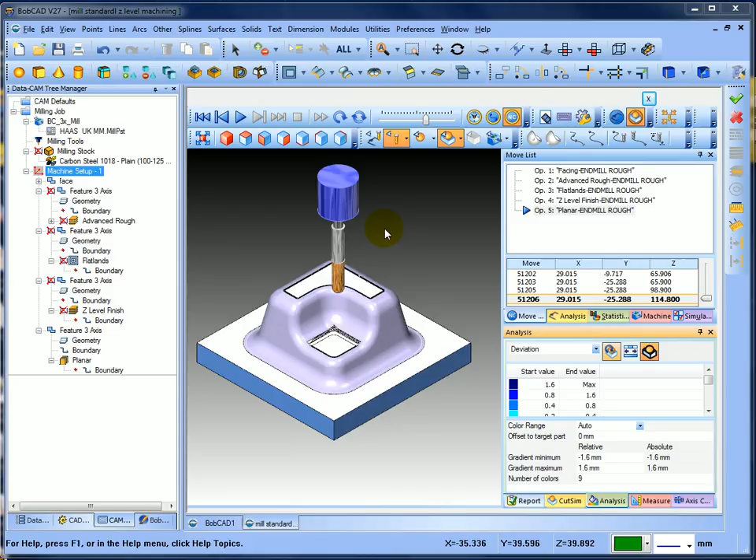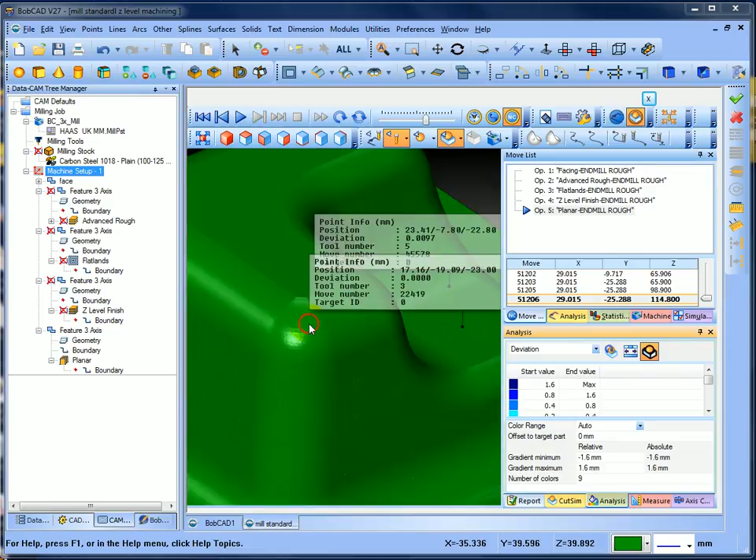Okay, if we have a look at it now, and there you see it's cleaned up. I can just click on these faces. It tells me what's left and what's not left. But as you can see, we've got a nice finished job doing a Z level finish. We did have to do a planar on top, just to clear out that bottom edge there. That's just because of the type of tools we were using. We had an end mill that can only go in so far, and a ball mill that can only come down so far. So what we had to do is make the planar toolpath.

And you can see there we created, you could have made a smaller boundary here, you could have reduced this boundary. We could just chop it away there and have even less. I can do that up here and show you. If I just went into lines, lines parallel, let's make it 6mm. Pick that line, come in, pick this line, come in, and then what I can do then is trim away what I don't want. So let's get some scissors and quick trim what we don't want. Don't want part of this or that, or this or that. So we could have made a boundary that looked like that.

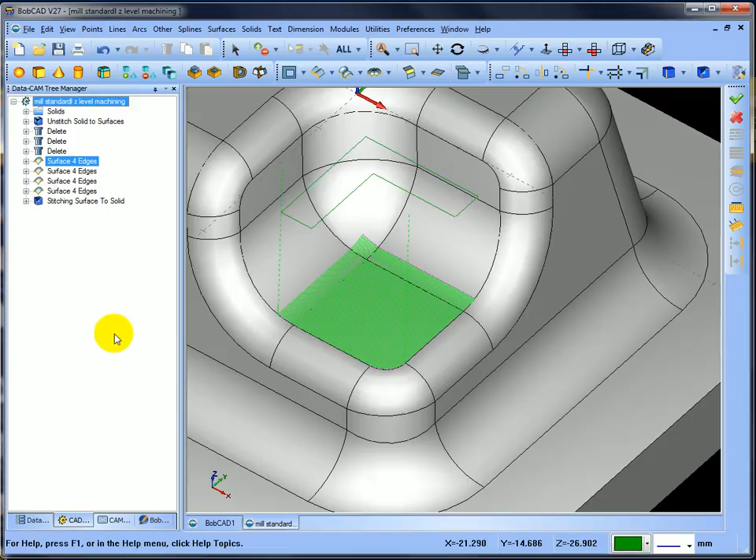So what we can do is go back into the operation, check the boundary. We can remove it and right click it and reselect it. Come onto it, press the shift key, highlight it, right click, select OK, and then get it to regenerate the toolpath. So if we compute the toolpath, you can see now we've just gone over that area only. So we're not doing any fresh air cutting there.

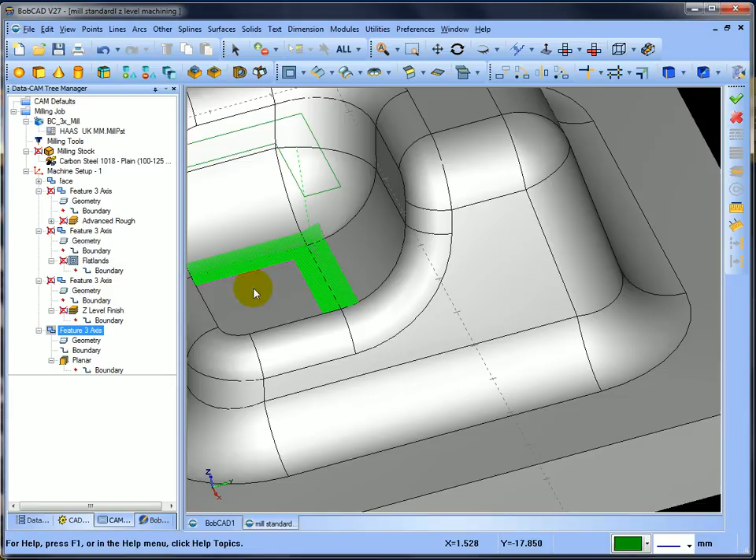So hopefully that gives you an insight into how you would manufacture that. I'm not saying you're going to do it the same as me, but hopefully I've given you some ideas about the Z level, the planar, the high speed machining, and hopefully that'll help you get started.